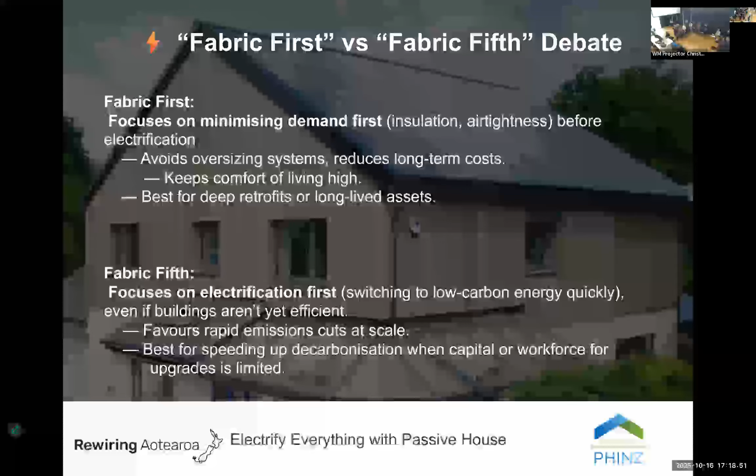We're going to have a very great selection of speakers today, I'm not going to name them all, they're going to be one by one. So we have representatives from the passive house side. We have very high enthusiasts of electrifying everything that moves. There you go, that's the one. We have representatives from our local distributor grids. We have representatives for those who provide us with equipment and materials to make our homes warm and solar. And we have also architects and city council representatives to really cover up every aspect of this topic.

I'm going to pass the floor on to Damien. He's our local Christchurch lead for the Passive House Association, and he's going to walk you through the concept of the passive house. There we go.

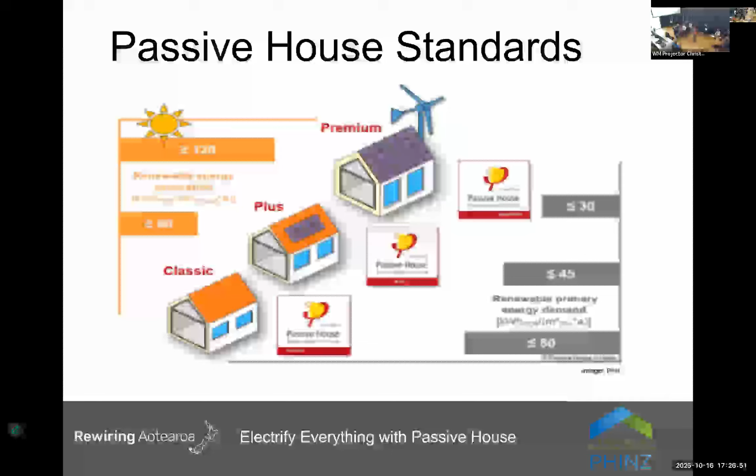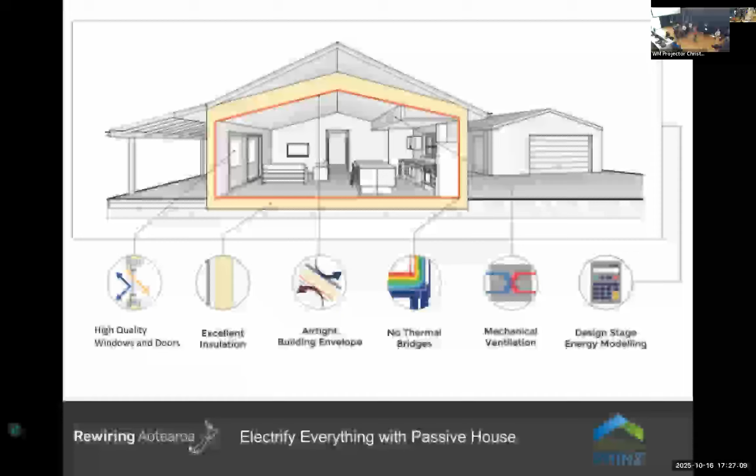My take on the 5 passive house principles: superior insulation, thermal bridge free, wonderful windows, heat recovery ventilation, airtight always. That needs to be wrapped up with energy modelling, which is a design stage thing, not a box-ticking compliance exercise like H1 is. So effectively, I only need 6 things — you only need to remember 6 things to build better buildings for all of us to thrive.

How do we know passive house works? 25 years of testing — actually, if we take 1990, 35 years of testing and refining. Every certified passive house is checked, tested and verified both through the design process and during construction by a third-party certifier.

Passive house provides homes where people thrive. If you're looking to build, have a chat to your builder or designer about how easily you can keep your house between 20 and 25 degrees. Can you test drive the house before it's built? That's what energy modelling can do. What's your continuous ventilation system? Opening windows doesn't work.

And can you add solar panels during there, or can you add them later on?

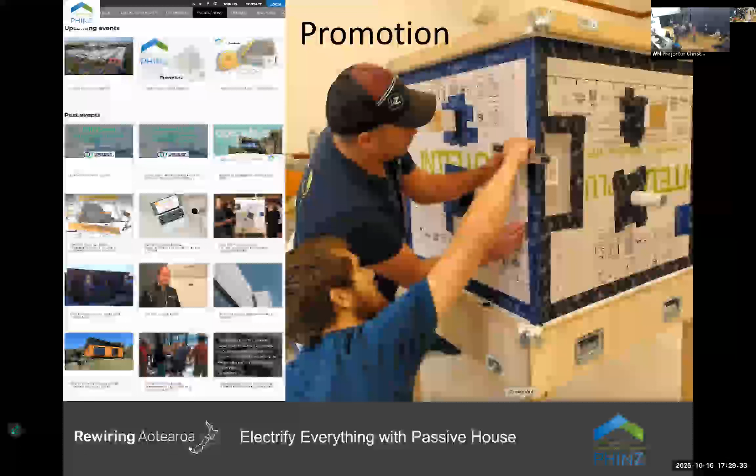We collaborate with industry and we help lobby and promote stuff that's going on. We work with suppliers. We promote what we do, also with suppliers, and there's lots of different trade groups involved. And we provide training through the Passive House Training Academy.

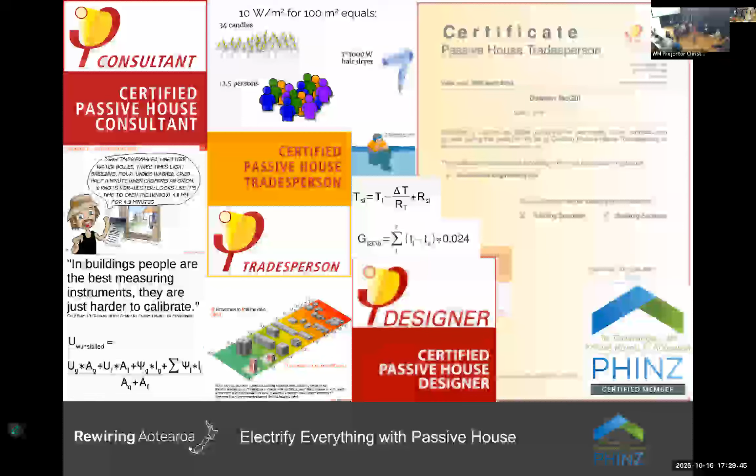Passive House is based on fundamental laws of physics, be it classical or quantum, but it's a technological application that doesn't require rocket science. In fact, anyone can understand it, and more importantly, anyone can contribute to making it happen. That comes from Dr. Wolfgang Feist, who earlier today put a message out about this event.

He said, with very low loads for heating and cooling, it's easy to electrify a passive house or an EnerPHit renovation. Everything you need is already available in the market at affordable prices. What must happen in parallel is the installation of PV systems and wind generators so that most of the electricity can come from these renewable energy sources. These combined measures will reduce dependence on fossil fuels, create local value chains, improve comfort and longevity of the buildings, and reduce climate gas emissions significantly.

I just think it's cool that someone that invented a standard from Germany is following what we're doing in little old Aotearoa.

Join us, get involved, and help us provide futures for all of us where we can all thrive. Thank you.

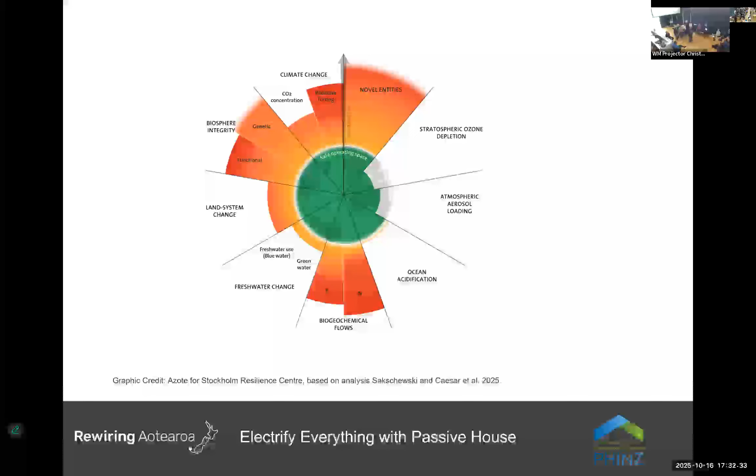Everything that everyone's going to be talking about is directly related to cogs, and let's call those planetary boundaries, and they're all part of a wheel, and let's call that a planetary system.

So, oh, back, stop. You need some training.

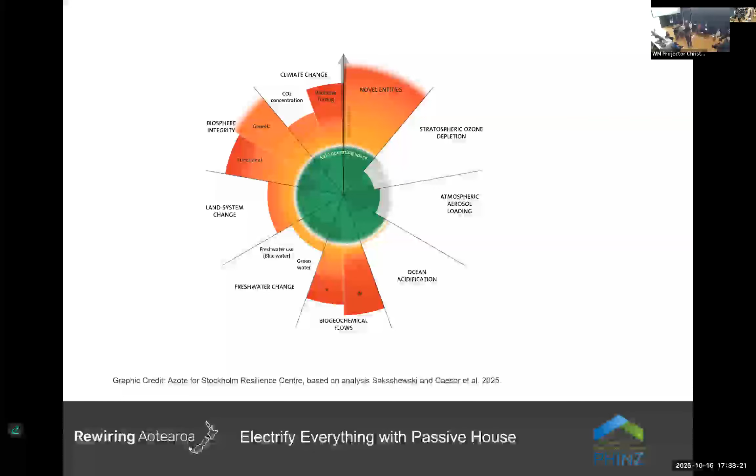2009, a bunch of top scientists, led by the then director of the Stockholm Resilience Centre, Professor Johan Rockström, first proposed planetary boundaries. And these are quantitative assessments, safe limits for human pressure on 9 critical change processes.

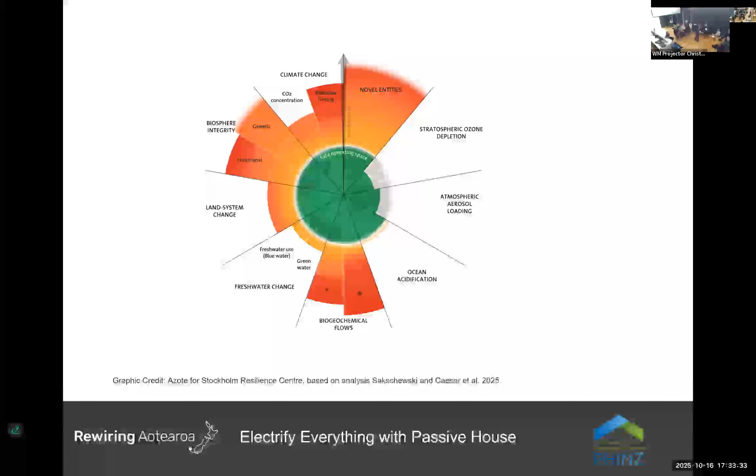Raise your hands if you know what they are. Goody gumdrops. So there are your 9. There were 7 in the first place and 2 were consequently split.

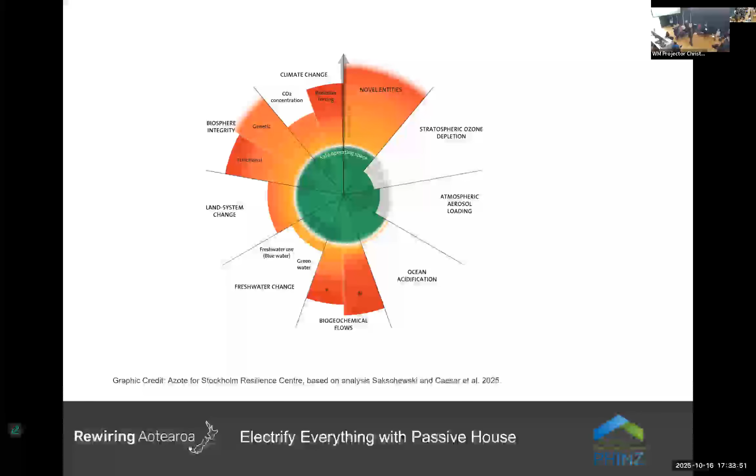And you probably want me to tell you about how they connect to the built environment, which is, I guess, what we're all into here. So, climate change: the industry accounts within cities for over 70% of CO2 emissions, buildings being 1 of 3 primary sources along with transportation and energy production.

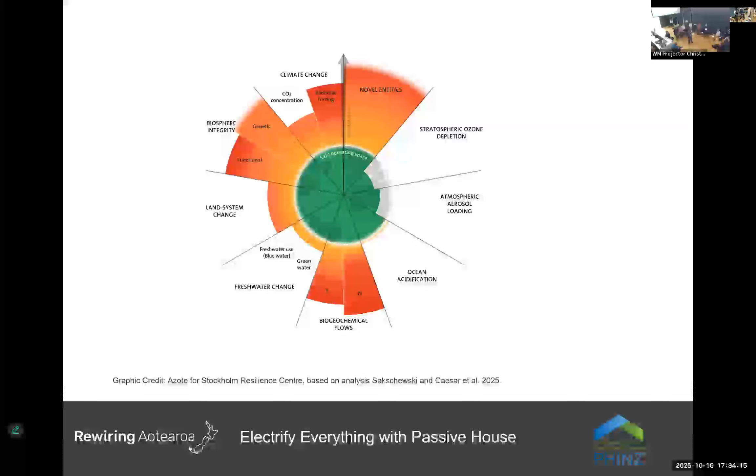Second boundary, novel entities. This includes plastics. So within the built environment, pretty easy to understand that building material supply chains cause pollution.

Stratospheric ozone depletion. How do we affect it from the built environment? Well, though aircon refrigeration gases have been largely regulated, they're still being used illegally in parts of the world.

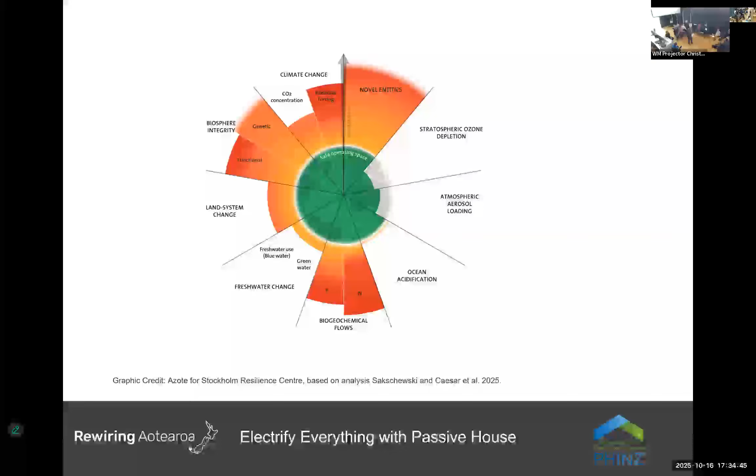Atmospheric aerosol loading. Within construction, our construction and demolition practices produce particulates and air pollution.

Ocean acidification, got sewage and urban runoff, affecting that from the built environment.

Modification of biogeochemical flows, stimulated by fossil fuel production and combustion. Freshwater change, impacted by concentrated urban water runoff.

Land system change, impacted by unsustainable production of timber products, and biosphere integrity, impacted by urban development.

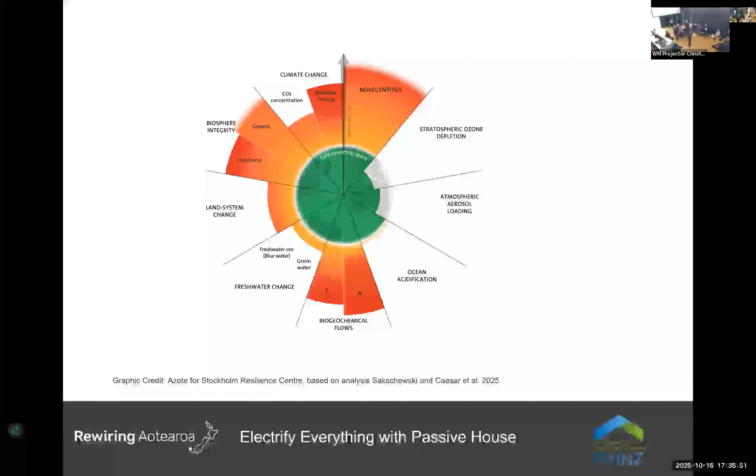From the Stockholm Resilience website, word for word: crossing boundaries increases the risk of generating large-scale, abrupt or irreversible environmental changes. The impacts of these changes will not necessarily be immediate or drastic, but together the boundaries mark a critical threshold for risks to societies and the biosphere that we're part of.

So, next slide there.

Assessments have been undertaken on the state of the planetary boundaries since 2009. In 2009, 3 of the 7 assessed boundaries had been crossed, and this included climate change. By 2015, 4 had been crossed.

By 2023, 2 of those boundaries were split, and 6 of the 9 assessed had been crossed. By this year, 7 of the 9 have been crossed, currently leaving only stratospheric ozone depletion and atmospheric aerosol loading.

So Arup, who are quite a clever bunch, in 2021 released a report designing for planetary boundary cities. Within it, they considered the 9 boundaries, how the built environment was detrimentally impacting those boundaries, and what could be done to bring about positive change.

So they worked and developed 20 regenerative actions that are considered could be implemented within the built environment that will in turn bring about change for all 9 of those boundaries.

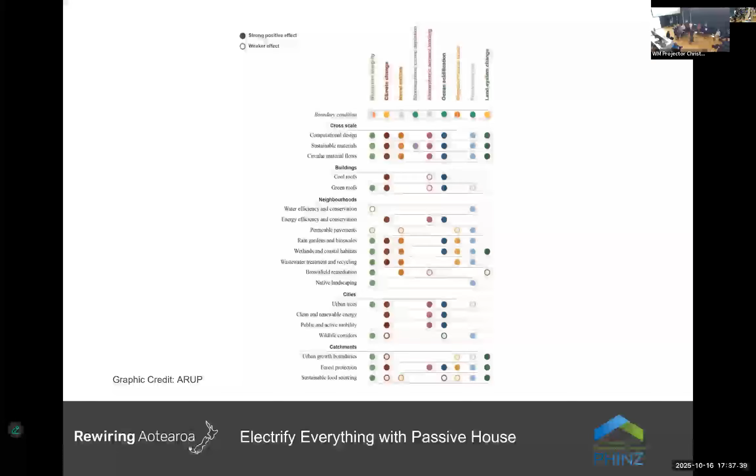Professor Johan Rockström, who's now current director of the Potsdam Institute for Climate Impact Research, and the centre itself since 2024 has been using the planetary boundary framework for its planetary health check. Their 2025 report was published last month.

In its executive summary, the 2025 Planetary Health Check report concludes that 7 out of 9 planetary boundaries have been breached, with all 7 showing trends of increasing pressure, suggesting further deterioration and destabilisation of planetary health in the near future. I know that's good news to you all.

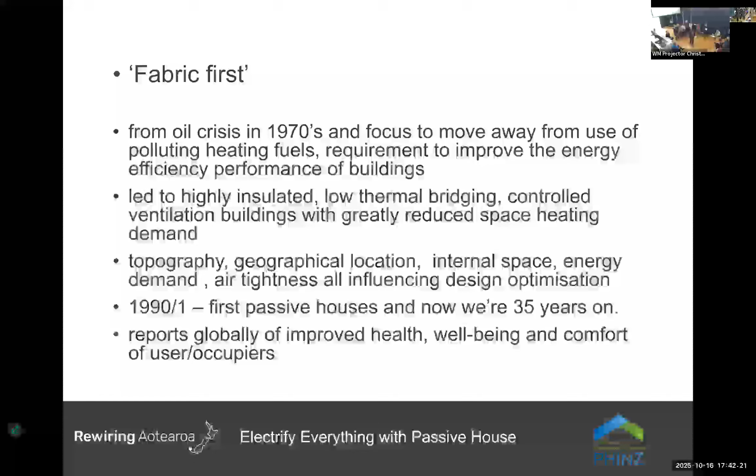It's nice, isn't it? Our existing stock is 1.85 million homes. The Green Building Council have identified that 800,000 of them were built before 1978, which probably means they haven't got any wall insulation - and I found most of them during the earthquake rebuild.

Do you want some of that? Of course I do.

So getting it right: 200,000, we're building 30,000 new ones a year, so 200 is going to take us quite a while to sort out, plus the 600 after that. So we need efficient use of all of our tools, and modelling has to take centre stage. Identifying 200,000 and 800,000 in an economic manner has to rely on some form of sophisticated criteria to identify where that work is going to bring the greatest benefits initially in the programme.

This could potentially involve the use of a retrofit coordinator and a whole pile of stakeholder involvement, training and policy change, fundamentally addressing the first and fifth response simultaneously.

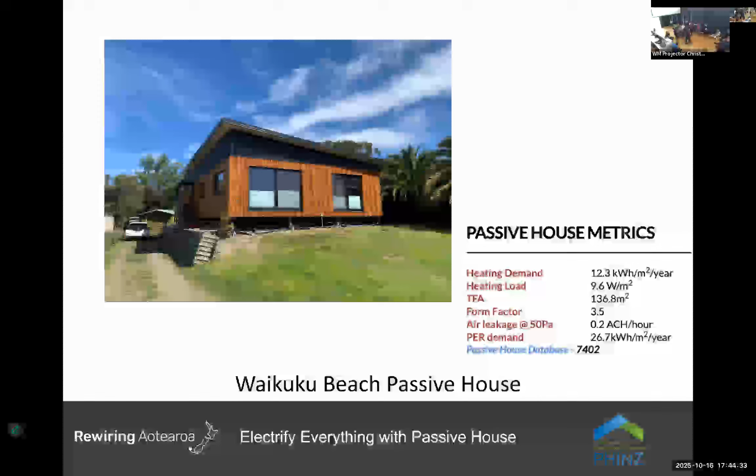Quick show of hands, how many people in this room want shit to be better? That's why I say e te whānau, we're all part of the same family. We might disagree a little bit on what is going to make shit better, but we all want shit to be better, right? Now, I want you to give me a warning at the 5-minute mark and then again at the 1-minute mark, just yell out. I'm used to it. But yeah, kia ora everyone.

My name is Mike. I run an electric cherry orchard about 5 hours drive from here, down in central Otago. We do grow the best cherries in the world, but what I've become very well known for is the fact that we run our farm entirely on 21 electric machines. Yes, I am all about electrification.

I've been asked to be very spicy tonight in terms of talking about electrification over fabric improvements in homes, and I intend to do that. But again, we're all part of the same whānau. I know in every single slide, someone in this room is going to go 'yeah, but' in their mind, and when you do that, I want you to hold on to it. We're going to have a panel discussion afterwards because there's so much nuance in this debate that I can't cover everything in 15 minutes.

I'm also the CEO of an organisation called Rewiring Aotearoa, which is all about electrifying the whole country very, very quickly, talking mainly about households, but also farms, small businesses, and eventually absolutely everything.

We aim to build the cheapest and most renewable energy system in the world, and we're going to do that by concentrating on the low-hanging cherries, everyone. Good joke that, isn't it?

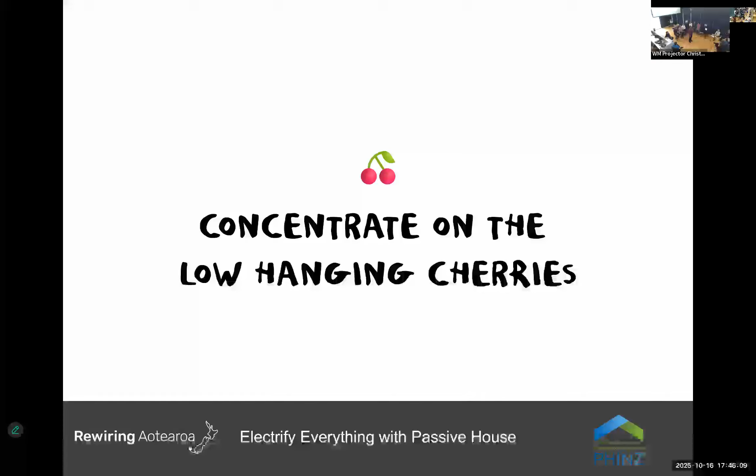There are 10 million fossil fuel machines in New Zealand. 700,000 are close to impossible to electrify right now - the big machines where the technology doesn't exist, or maybe exists somewhere in the world but is hardly economic for us in New Zealand. There's 1 million machines that are almost ready, and 8.5 million machines that are ready to electrify right now with today's technology, off the shelf in New Zealand, where we will save a bucket ton of money.

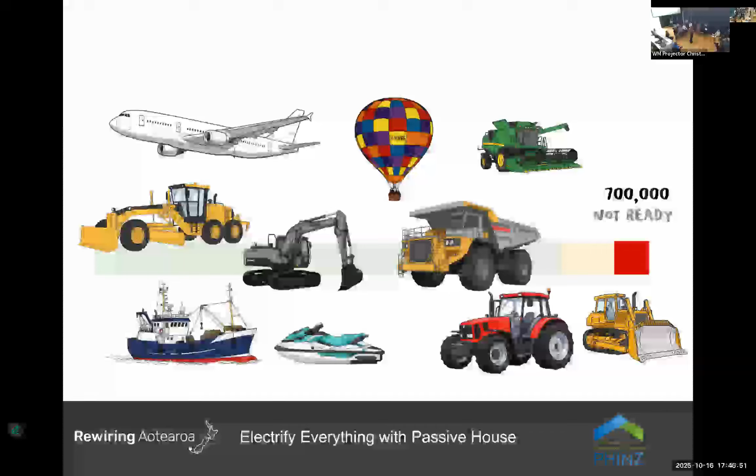There are 64 hot air balloons in New Zealand. The hot air balloons are not a reason for us to delay electrification of our country, right? It's as simple as that.

There are about 1 million machines that are almost ready - our utes, some of our smaller tractors, our boats, the 50 electric dump trucks we have up in Auckland. These require electrification heroes to start electrifying them, burning far more energy and willpower than we would consider reasonable. And there's 8.5 million machines that are ready to electrify now.

And where do most of those machines exist in New Zealand?

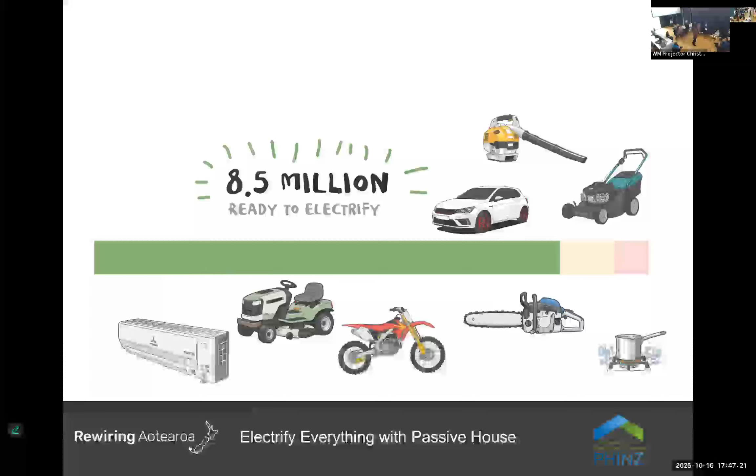In the home, 100%, right? They account for about 25% of New Zealand's gross emissions. It is a ridiculous amount of emissions that we emit every year that we no longer need to, and we're spending a lot of money doing so.

Now, the important thing is I come at this from a slightly different angle to the built environment, or people that are professionals in that space. I like to include the car. When I think about the customer, I think of their bank account and all the money that leaves their bank account to pay for energy. And as soon as we include the car in this, along with our space heating, the way we heat our water, the fridge, the light bulbs, and everything else, it starts to paint a different picture on the ROI for the households of New Zealand.

Electrification is the efficiency that we have always been looking for, right? When you have a fossil fuel home that runs off gas and petrol, and then you compare it to a fully electric home, it uses about a third of the energy to do the exact same job.

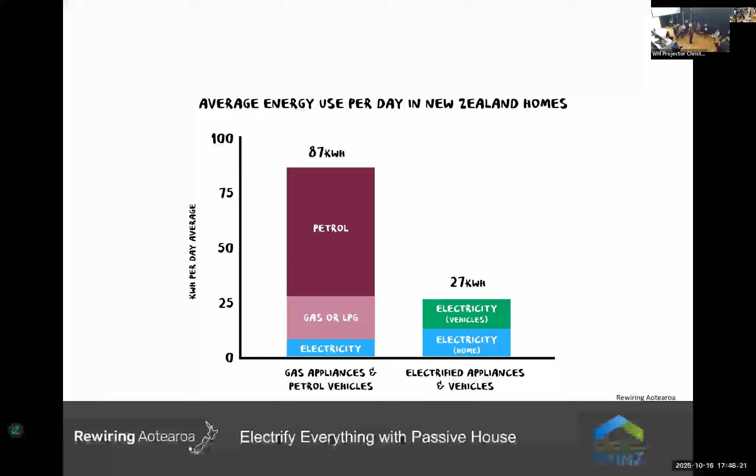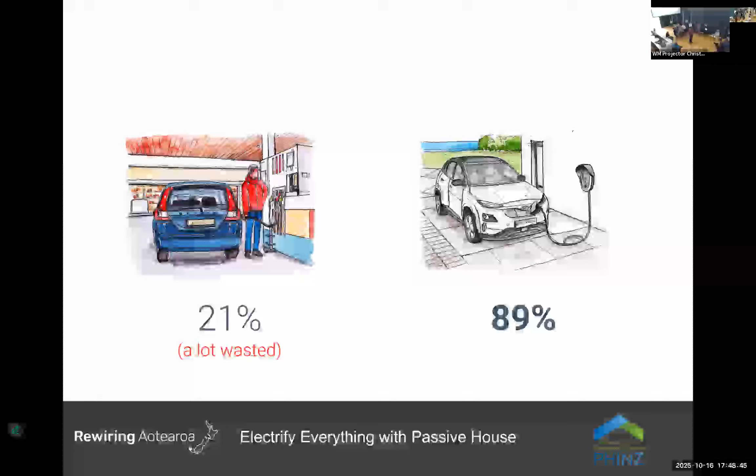Pretty remarkable. And if we look specifically at our cars, when you put a litre of petrol or a litre of diesel in your car, about 21% of that energy is actually used to push the car forward. Everything else is wasted heat, wasted noise, vibrations. When you put electricity into an electric car, nearly 90% of it gets used to push the car forward. They are far more efficient machines.

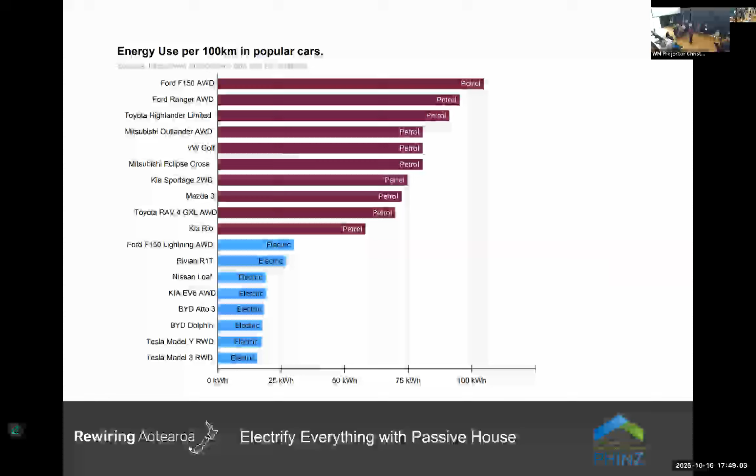In fact, they're so efficient, when you look at the largest electric vehicle on the market in New Zealand, a Ford F-150 Lightning that they convert in Australia and bring over here, it uses less energy than a Honda Jazz. Isn't that remarkable, right? This is energy efficiency right here.

And what's really interesting, of course, is that 85% of energy put into EVs in New Zealand come from sockets in the home. Yes, the car is a massive part of home energy bills moving forward.

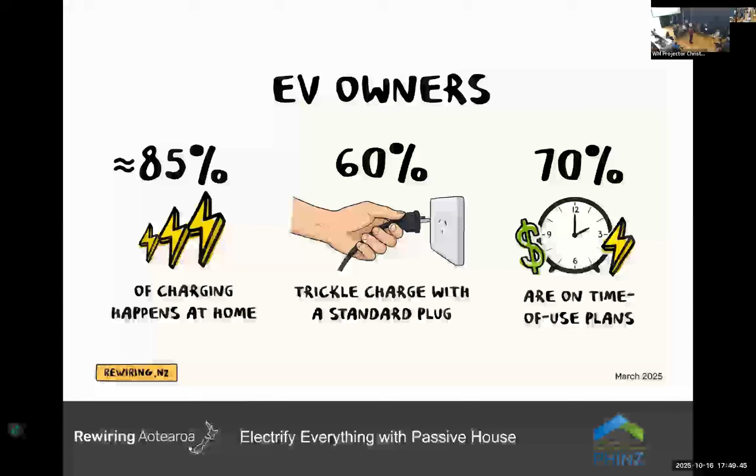Then we can look at our heating. Very simply put, if we put wood burners in homes, about 65% of the energy in a log is used to heat the home. The other is wasted in things like light and noise and heat going out the chimney. When we look at gas heating, it's about 80% efficient, which actually sounds pretty efficient, doesn't it? Of course, you all know this.

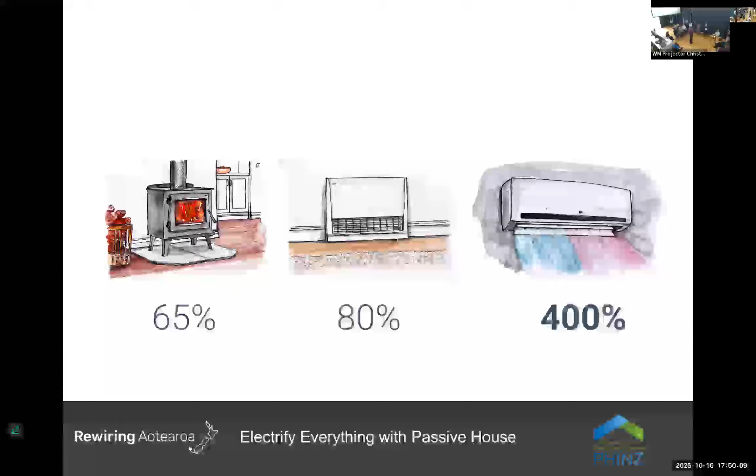Heat pumps, 300 to 400% efficient, right? Remarkable returns on investment. And when you look at this, you can sort of see the daily requirements of energy use, but based on the different types of heating appliances in the home. It is remarkable how much of an impact a heat pump can make over, say, gas or LPG heating in this country. And of course, that translates to the overall lifetime cost of an appliance.

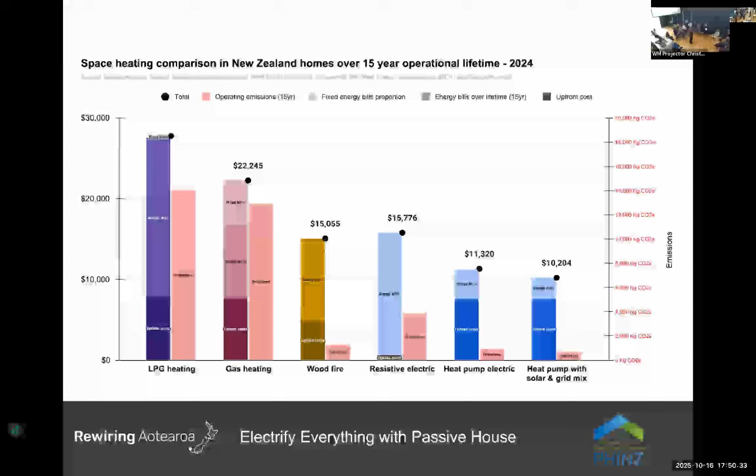If you buy a gas heater for your home, you're paying significantly more money over the lifetime than if you pay for an electric equivalent.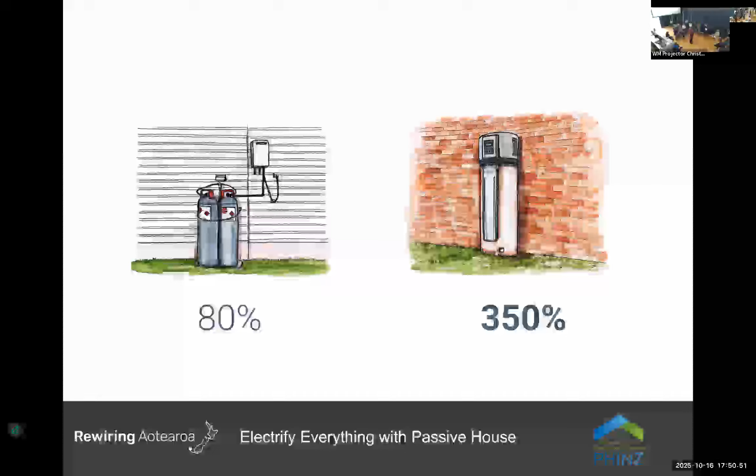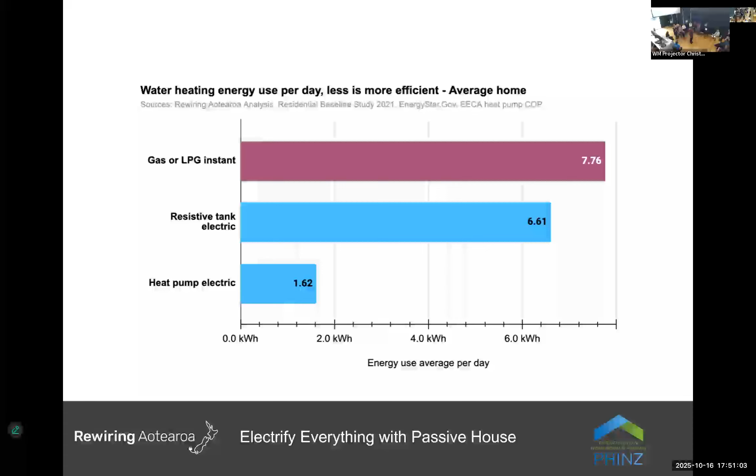Then we've got our hot water. Hot water heat pump just over there - I encourage everyone to have a look at that in great detail. But again, gas hot water heating is about 80% efficient, while hot water heat pumps are about 350% efficient. When you look at the amount of energy required to heat water with a hot water heat pump per day, it is considerably less than a gas equivalent and considerably less than an electric resistive equivalent. And again, the prices for lifetime ownership of these machines is considerably less.

Then we look at cooking - 30% efficient. And with that, we're putting all sorts of bad chemicals out into the air, nitrogen dioxide being one of them, that have a lot of serious health impacts.

70% of that is wasted compared to about 78% efficiency of an induction cooktop. Remarkable savings again. And again, when you look at the energy use in the home, not as higher amounts of energy are used for cooking, but it is still far more efficient.

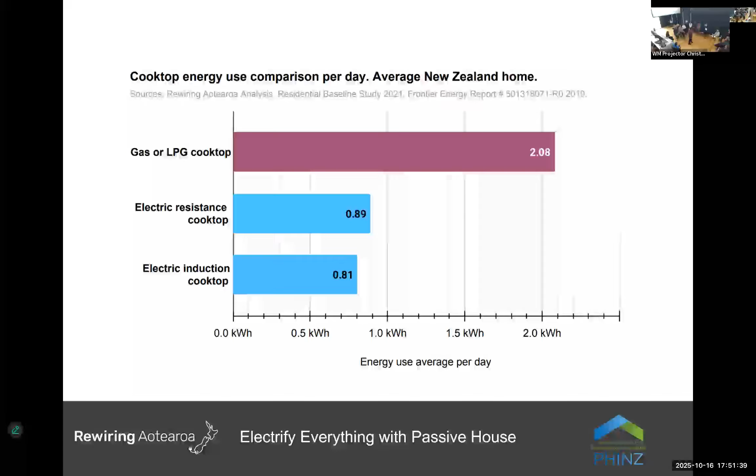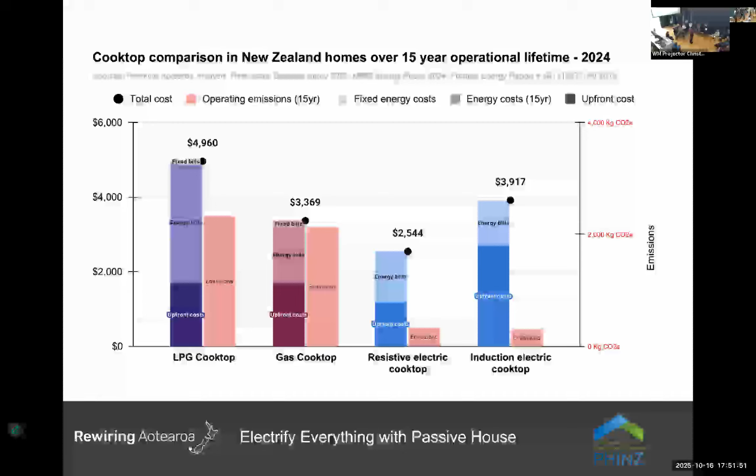Because it uses less energy, at the moment we're not at a point where we can say induction cooktops are going to be cheaper than gas cooktops over their lifetime, especially on the reticulated gas networks in the North Island. But with the fact that we're running out of gas, that is changing very, very quickly.

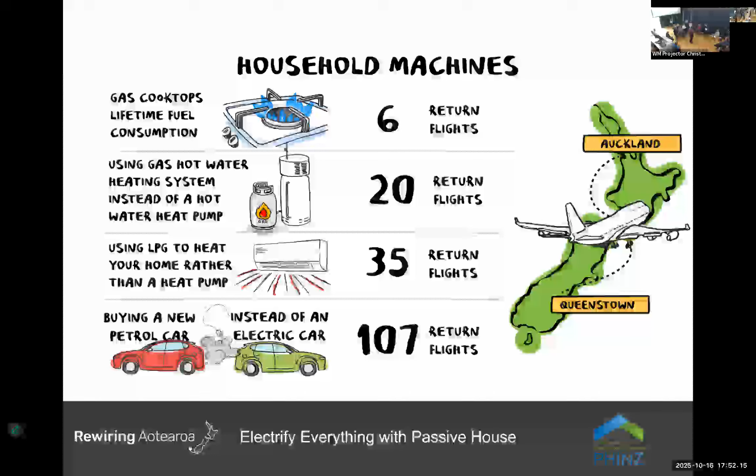Another way of looking at this is the electric machines in the home. If you choose an electric machine in the home over a fossil fuel equivalent, think of it like the number of return flights between Auckland and Queenstown. We always talk about climate action being in terms of maybe eating less red meat, drinking less milk, flying less. The number one way that the households of New Zealand can have an effect on climate change is to make sure they go fully electric.

We must electrify everything. But what happens when we electrify everything? Our power bills go right up. Yes, because we consume way more electricity.

And this is the breakdown of a power bill in New Zealand. You're paying about 35 cents a kilowatt hour for what we call delivered energy to the home. Half of that is generation at our large power plants, and the other half is all the other stuff that we have to pay for to transport those electrons from the power plants to our homes.

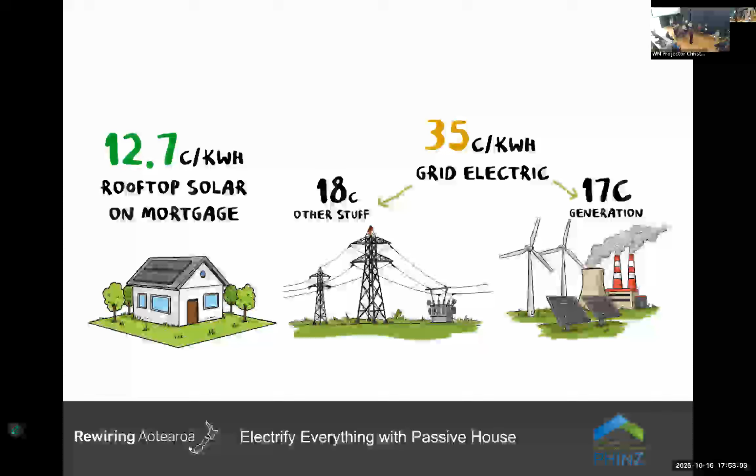And just to give you some stark contrast, when we finance solar panels on our rooftops at 5.5% interest rate, so a standard mortgage interest rate, nothing clever, it works out that those panels will generate at about 13 cents a kilowatt hour. Remarkable savings opportunity.

In fact, even if you look at gross savings and you take out the capital repayments and the interest repayments on a 9 kilowatt system, the average typical home in New Zealand will still save $1,000 a year. That is $3 a day return from day one when you finance solar panels on your rooftop. It is by far the best ROI of any home improvement that a family can do within our country.

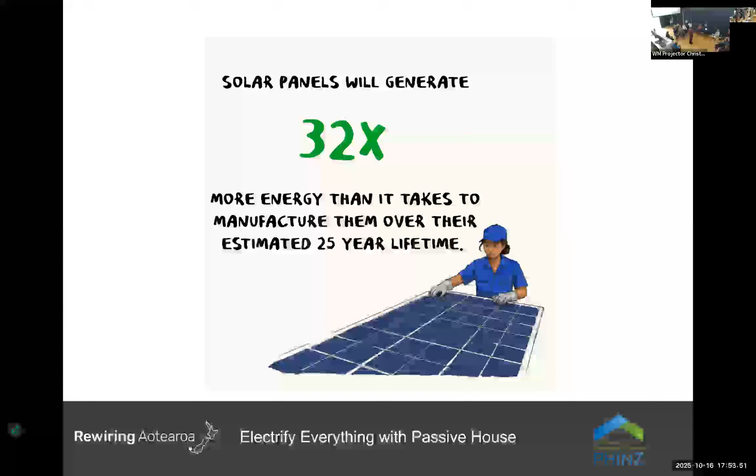We talk about embodied carbon emissions. That comes up a little bit. The important fact to remember here, again, with New Zealand solar yield, is it's very important that we use New Zealand data. A solar panel will create 32 times the energy that it takes to make it over its lifetime. It is a really significant improvement on energy production in our country.

And one of the other things to think about is that even in winter, a 9 kilowatt system will generate the same amount of energy as 1 tonne of coal. And I know, because we're all part of the same whānau, that we're incredibly embarrassed about the amount of coal that we burn for electricity in New Zealand.

120,000 homes with a battery, right? That is larger than the peak response of our largest hydro dam. A lot of a little is a lot. The systems improvements from electrifying our households are so significant that we need to all band together and figure out how to make this happen very, very quickly.

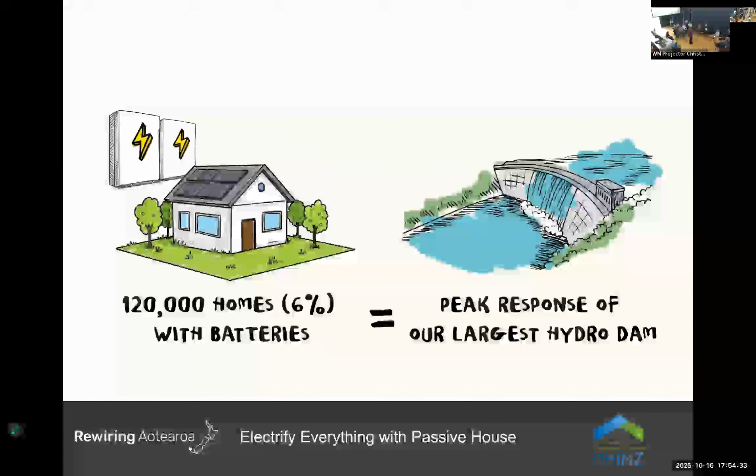See, New Zealand's energy system isn't actually very renewable at all. We like to talk about how renewable our electricity system is while sweeping under the rug how unrenewable our overall energy system is. And it's expensive.

Collectively, you and I spend $55 million a day on fossil fuels. Isn't that a remarkable amount of money?

Just electrifying all the homes in New Zealand, including the cars, putting some solar panels on the roof and a battery in the garage, will save our 2 million homes about $29 million a day. That is so much money.

By 2040, if we do this and we commit to doing this, that's $100 billion, which is so much that no one knows how to contextualize how much money that is, so I've done it for you. We could not build hospitals fast enough to keep up with the household savings.

This is not money that's going to Christopher Luxon or Treasury. This is money that stays in our wallets in our communities. This is why I get so passionate about this kaupapa. We could not build Christchurch rugby stadiums fast enough to keep up with your savings. That is how remarkable this opportunity truly is. It also shows you just how expensive Queenstown roundabouts can truly be.

Rewiring Aotearoa was born out of the work that a chap called Saul Griffith, an Australian, did in America, and then moving back to Australia and starting Rewiring Australia. He makes climate action really simple for everyday people to understand.

Now, how many people had a 'but' thought? One, two, couple of you, good. Hold on to those, because I can't wait for this panel discussion when we can go into a lot more nuance, because I don't have enough time to go into all the nuance over the phone. But if there's one thing I can ask you to do, it's I want you to electrify everything in your life. And once you've done that, well, then I want you to electrify everyone in your life. Thank you very much.

Kia ora, I'm Pip Newland. I'm the head of sustainability risk and insights. We do all the future energy scenarios at Orion, and I also have the fun task of looking after the market and customer innovation team. They do all the stuff that looks at how people use energy and how that affects the assets that we're actually investing in.

So just a little background about Orion, apologies for those who already know this. We are the lines company, the electricity distribution business for Central Canterbury. We cover Christchurch, the Selwyn district, and Banks Peninsula. We've got about 228,000 odd connections now, about 8,000 kilometres of lines. We're a linear infrastructure company, so we own lines, cables, kiosks, substations and all that kind of stuff. We are effectively an electron courier, so we invest in that infrastructure.

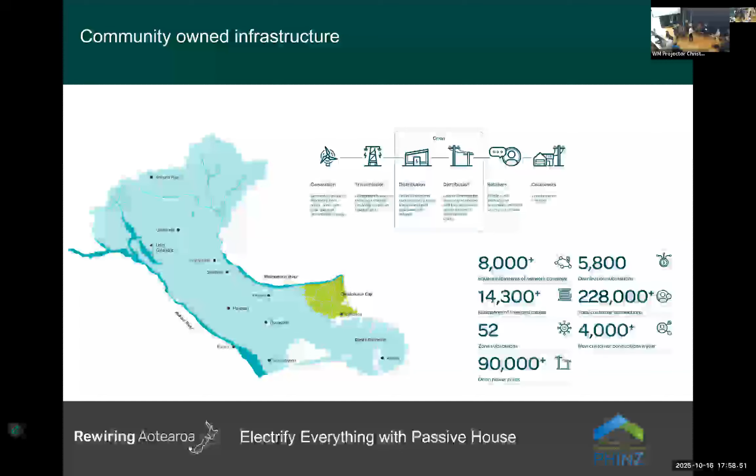Probably the thing to bear in mind in this conversation is that infrastructure is two things really. One, it's owned by the community, so we are owned effectively by the City Council via CCHL and the Selwyn District Council. The other thing is that infrastructure is an asset, and it's a carbon sink effectively. Every piece of infrastructure we own carries an embodied carbon footprint with it. So the better we can design our network to change how people use their electricity, and the more efficiently they can use it, the less infrastructure we build, the less carbon goes into it. So there's a bit of a trade-off there.

The other thing to bear in mind is that Orion in various forms has been around since about the 1900s, so there have been a few transitions during that period. One thing to recognise about this community in particular is that we're really good at transitions. First, moving from coal, gas and steam in terms of local generation. Then we moved into electrification of home heating. And now we're moving into this new period of time with redistributive systems.

So what does that look like for us? Redistributive systems - if you think our network has traditionally been built as a linear system, it takes electricity from generation in central places, transports it through the transmission system, thanks Transpower, gets it converted into residential and business friendly voltages, and then transports it to your house or business. So traditionally it's gone one way.

Now we're actually in a position where the technology has evolved enough that electricity can travel back the other way as well. This opens up a whole raft of opportunity for communities to generate and share electricity in a way that isn't constrained by central generation, and actually enables them to be more resilient and produce more affordable electricity within their own energy ecosystems. So you're moving into that kind of model.

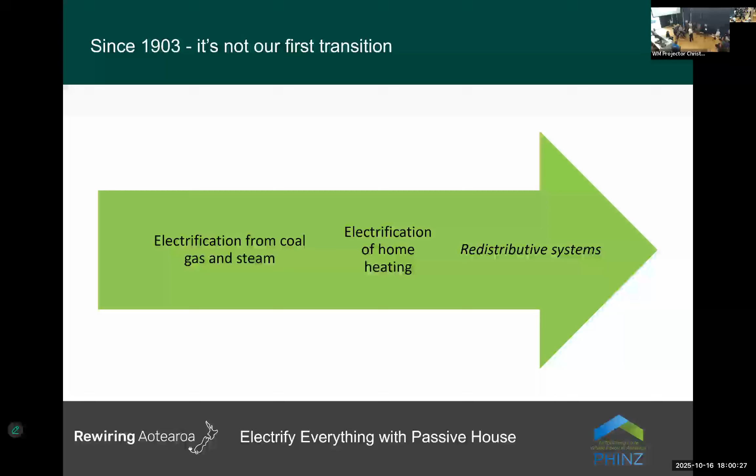That in itself lends itself to being able to manage this transforming system - we call it the trilemma. So that's balancing energy equity and affordability, energy sustainability - how is it generated, how much carbon is associated with it - and energy resilience, which is thinking about whether it's there all the time when you need it. So when we make investment decisions as a business, we're always thinking about balancing these three things, and a truly sustainable system does that really well.

Consumers, and the way they use their electricity and the things they use their electricity within, play a really big part in balancing this trilemma. It can't just be done from one party within it.

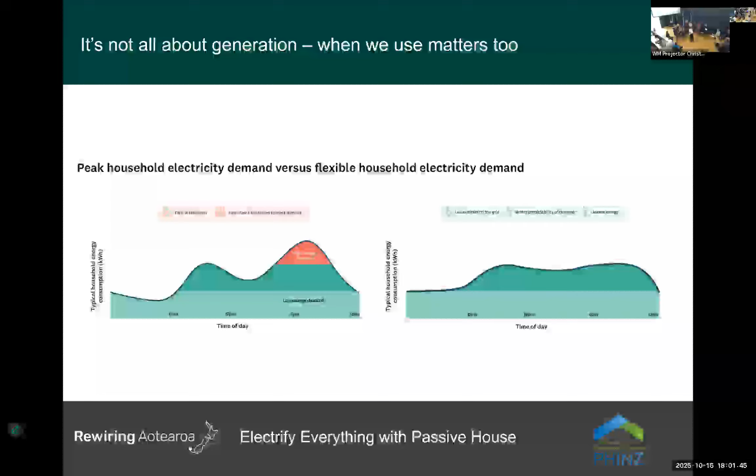Just leading into that a little bit, it's not all about generation, and that's sometimes what people miss. We talk about both supply side and demand side when it comes to energy. So this is a pretty typical household electricity demand - I've pinched this off the EECA website, thanks EECA.

When people use matters just as much as how they use and how it's generated. So if we're able to shift when people use - if you can see that little red hump - you can flatten it out, and that changes the electricity mix delivered to your doorway. Typically the generation stack brings on the most expensive things at the end, so if you want to avoid using coal to generate your electricity, you need to think about when you're using.

Now, what typically happens is everybody switches on their jug at 7 o'clock in the morning and cooks their dinner at 6 or 7 o'clock at night, and that adds up to a peak. We build network and generate, and the generators generate to service that peak. So you've got to think about what goes into that space.

So I'm going to talk about Orion now. We definitely build network to service our peak - we talk a lot about peak load. A lot of what our market and customer innovation team are doing is investigating demand side options to shift that red peak onto different times in the day. And that's when storage becomes a really big thing.

What do you use to store energy? People think straight about batteries, but you've actually got hot water in your house, and your whole building envelope is storage. That becomes a really important part of how we manage energy use within the system, and that can bring the whole energy costs down and also the associated carbon emissions.

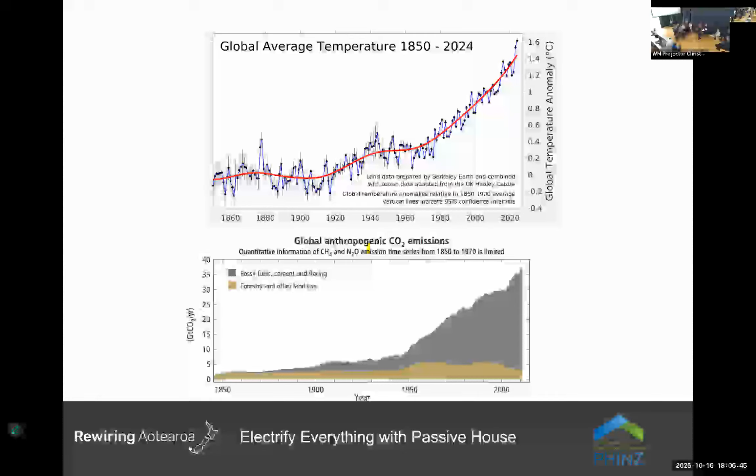These fuels, mostly coal at first, then oil and gas, were burnt to power steam and internal combustion engines, to run furnaces and factories, and to mechanize the means of production. As a result we have the living standards of today: sleek glass and steel buildings, and as Dire Straits said, microwave ovens, custom kitchens, and colour TVs.

But as the old saying goes, there's no smoke without fire, and when you have a lot of fires, it stands to reason there's a lot of smoke. All that smoke, largely carbon dioxide, ended up in the atmosphere, as did an alphabet soup of other gases: methane, nitrous oxide, CFCs, HFCs, HCFCs, and so on.

As we now know, but have conveniently ignored since 1824, these gases trap heat radiating from the Earth, creating a greenhouse effect and raising the temperature of the atmosphere. Collectively they're called greenhouse gases, or GHGs, and we measure them in equivalent units of carbon dioxide warming potential, usually just abbreviated to carbon.

So constructing and running any building emits carbon. This might happen in any number of ways: loss of forest cover due to logging to provide timber, manufacturing processes for products such as cement, steel, or glass, or building air conditioning.

To allow us to compare apples with apples, carbon is lumped together into different packages or modules depending on when it's emitted. The stuff emitted during the actual construction process, before you get the keys, is known as upfront carbon, embodied carbon, or modules A1 to A5.

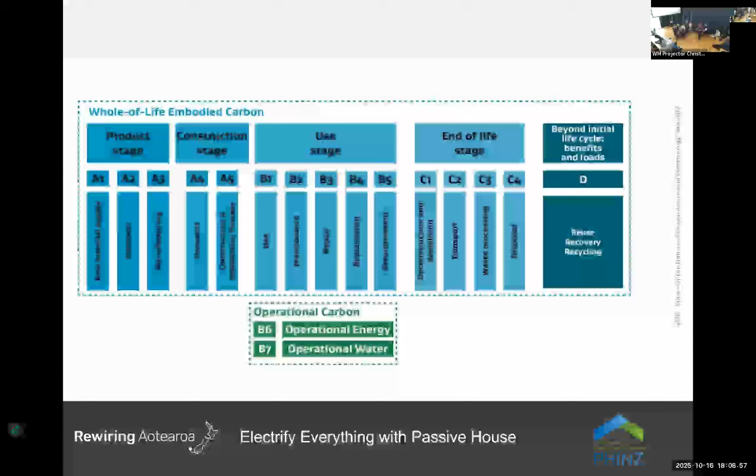C1 to C4 is the end of life stage, including demolition or deconstruction, transport, waste processing, and disposal. Stage D covers any benefits beyond the building life cycle, recycling or reuse — this is where the circular economy comes in. Products used here can approach carbon neutrality in their second life.

Overall, buildings contribute 39% of global greenhouse gas emissions. On average, 60 to 80% of this is upfront or embodied carbon, and the remaining 20 to 40% is operational carbon — heating, cooling, and so on. But the exact split varies depending on location and how the electricity is generated.

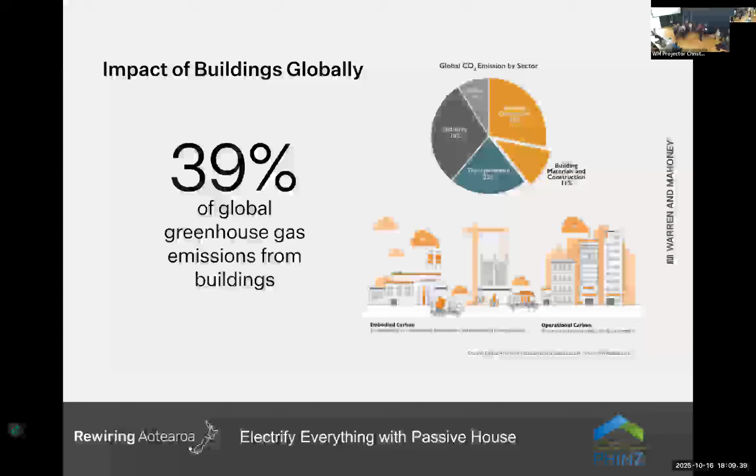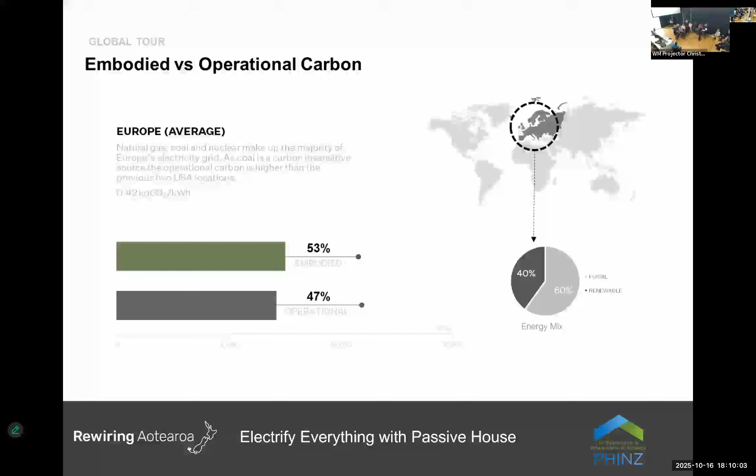Warren and Mahoney did an exercise a few years ago to compare the exact same building in different locations to see the effect of different grids. What you want to look at here is the dark grey bar at the bottom — this is the operational energy, which in effect measures the amount of carbon emitted by each grid. In Europe, we found a 50-50 split between upfront and operational carbon, and their grid is reasonably clean, around 40% renewable. In the US, New York and California are reasonably similar to Europe, although with less renewable energy.

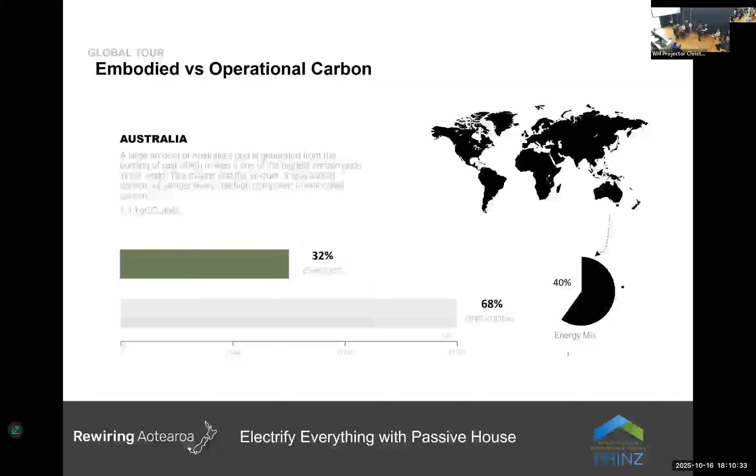By comparison, Hawaii has a very dirty grid and relies heavily on coal and oil, with a 60-40 split between operational and upfront carbon. Similarly, Australia has a phenomenally dirty grid, uses heaps of coal, and has a 70-30 split between operational and upfront carbon. So the trend is that the dirtier the grid, the bigger the effect of operational carbon.

But in New Zealand, as always, things are just slightly different. The graph on the left, my right, your left, suggests the energy use of the building is around 5% of the national energy use, but this doesn't account for the construction processes. And when upfront carbon and imported materials are included, as you see on the right, the construction sector contributes to around 20% of the national carbon emissions.

But this is still only half of the international average of 39%, for several reasons. Our electrical grid is largely renewable, around 85%, ignoring the cars though. We have a much higher proportion of agricultural emissions than most countries, and we have poorly performing building stock and a comparatively benign climate. As a result, we don't heat our buildings to the levels seen overseas.

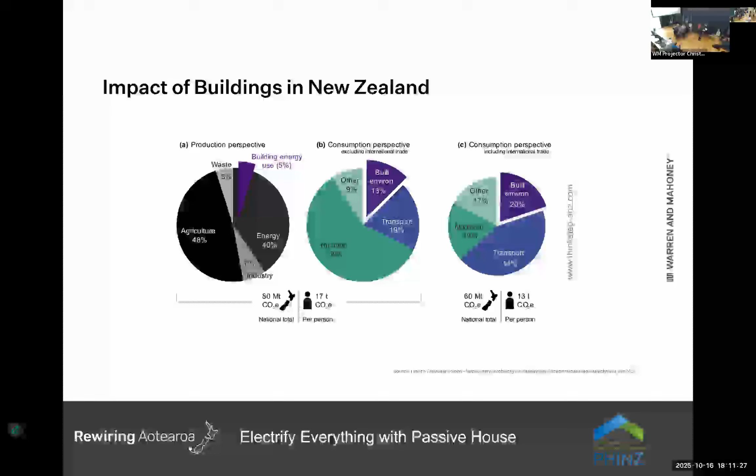And so in New Zealand, because of our clean grid, the upfront carbon of our buildings has a much higher impact than anywhere else.

Essentially then, the fabric first or fabric fifth debate is discussion whether it's better to focus on B6, operational energy use and carbon emissions, or upfront and in-use carbon emissions A1 to 5 and B1 to 5. And as you've just seen, the answer depends on where you live. But there's also another factor to consider, and that's time.

So this is a well-known graph derived by John Ochsendorf of MIT, and the black line shows the upfront carbon that's mostly all emitted at the beginning of a building's life. It's shown effectively horizontally here, although in reality you'd see a few blips when, say, the carpet is replaced or it undergoes maintenance.

The red, yellow, and orange lines show the cumulative operational energy used by low, medium, and high efficiency buildings. And now it would seem possible, as you can see, the more efficient the building, the less energy you use. Strange. So it would seem possible that the operational carbon of a super efficient building...

...say passive house with a net annual energy demand of 15 kilowatt hours per metre squared, might never exceed the upfront carbon emitted by constructing that building, and that's the green line. And if you had on-site generation, say passive house premium, wouldn't that just mean that the solution is to reduce operational energy to effectively zero and all our problems are solved, i.e. electrify everything? The blue line.

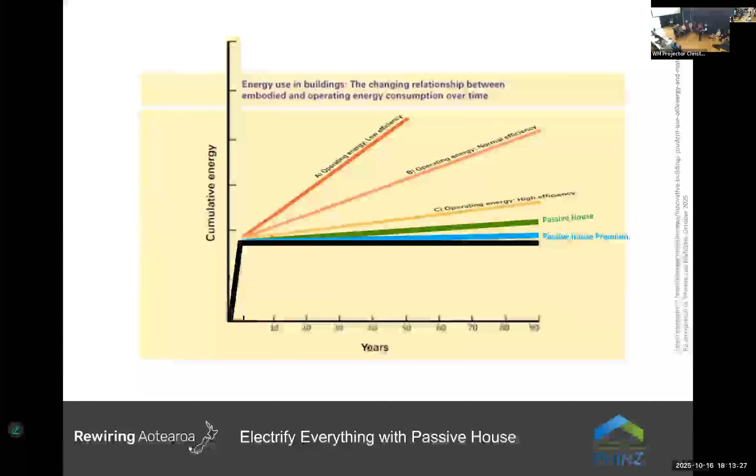But the upfront emissions of the building are actually baked in as soon as the project starts on site. So in reality, the carbon emission profile looks more like this: one big burp to start with, followed by a long tail of ongoing emissions. I was going to make a note that this was the good news, but I'm not entirely sure that's right. Because this is the bad news.

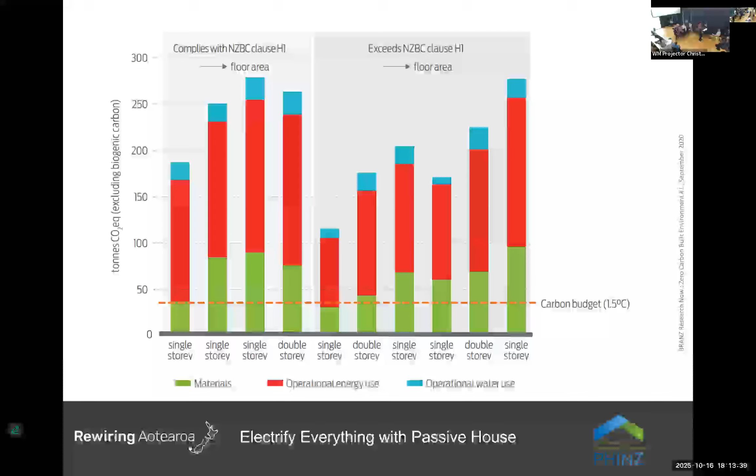The bad news is this graph from BRANZ's 2020 study, Zero Carbon Built Environment number 1. Using planetary accounting, it calculated the allowable carbon emissions for the construction sector if New Zealand was to keep to the Paris 1.5 degree commitments. And that's the red dashed line you can sort of see sneaking in at the bottom there. So you can see there's a serious mismatch. Even the most efficient builds are more than 3 times the 1.5 degree budget.

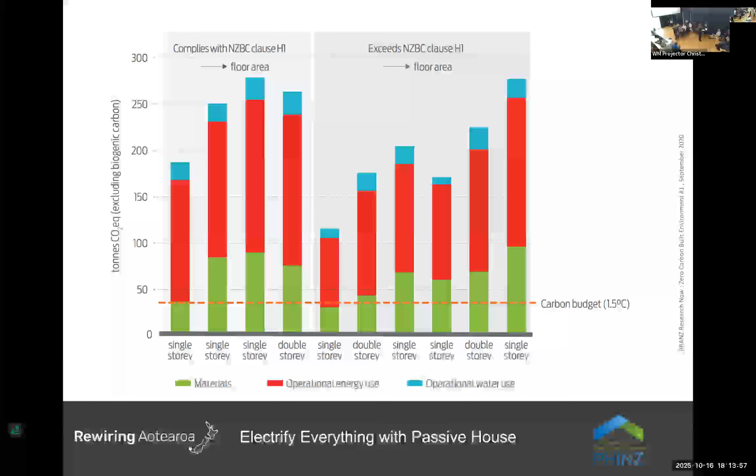So what to do? Well, this helpful diagram sums it up: use less stuff. It's from the Institution of Structural Engineers, but the principles relate reasonably well to architecture. So to start doing myself out of a job here, the first thing is to build nothing.

There's obviously a moral expectation to allow the rest of the world, i.e. the global south, the opportunity and ability to improve their living standards. So somehow we have to navigate that challenge, and it really has to start by leadership and commitment to zero carbon from the Western world.

Secondly, we can build less. We can repurpose, refurbish, and reuse existing buildings. We should be building clever. This is where you guys come in: high performance and low carbon architectural elements. Straw bales, mass timber, and wood wool insulation, for example. Not steel, concrete, and polystyrene. And build efficiently. We shouldn't be building 450 metre square houses for 2 retirees, let alone ones with helipads.

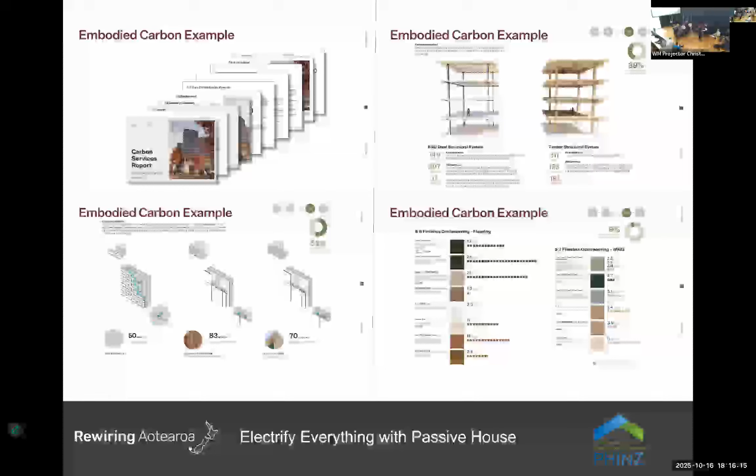More recently, MasterSpec, in conjunction with BRANZ, have released a new website, neco2.co.nz, which is - and you have to hold your breath for this one - the National Embodied Carbon and Environmental Product Declaration Repository. It's more useful than the mouthful it is to say.

BRANZ also have a free and slightly clunky spreadsheet, LCA Quick, which allows you to assess your own project if you've already modelled it.

Operational energy is a bit more tricky for commercial buildings. My experience is that the services consultants will rightly point out that energy usage is hard to predict because it depends on how the occupants run the building, so they refuse to commit to a figure or provide any guidance. But NABERSNZ have a post-construction measurement system for commercial buildings. This has a sinking lid, so it encourages incremental and continual improvement on a year-by-year basis.

And obviously, the passive house planning package is aimed specifically at operational energy and is hence a proxy for operational carbon. But by itself, it doesn't calculate embodied or upfront carbon. There is a plugin, the PH Ribbon, which claims to do this, or you'd have to check that this is appropriate to and able to be set up for the New Zealand market.

There's a number of architects and passive house designers around the country. PHINZ have a list for these, and I'll direct you to the PHINZ people here. Although experience in New Zealand is generally limited to residential projects, a few commercial buildings are starting to pop up in and around Wanaka.

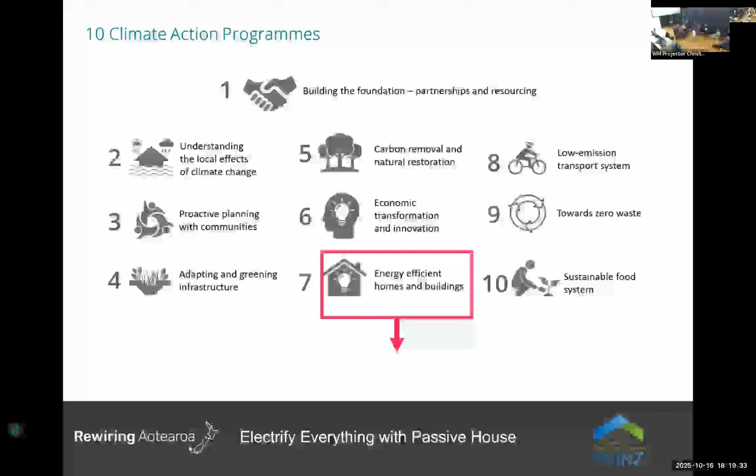With this, we've got 10 climate action programs. They are here. Number 7 is about energy efficient buildings, and that's me, the Eco-Design Advisor Service. It's a free service. So basically the council has a procurement policy, and it's all about finding the right balance between the people, the money, and the environment. It's not something easy to mix, but basically every single project has its own priority, and we need to identify what they are to be able to achieve it.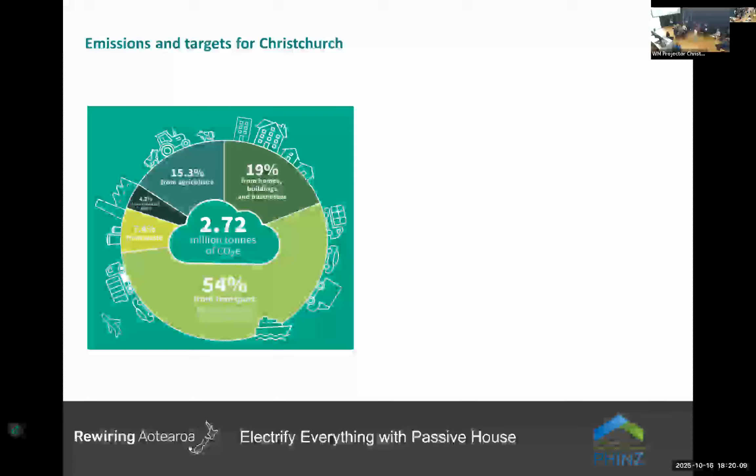So emission and targets for Christchurch. In 2019, this is basically a little diagram that shows you what the emissions were for the district at the time.

We've established 2 goals. So you have to think about, we want to reduce carbon emissions for the district and for the council as an organization - sorry, I'm French, so I stumble on some words. So as a district, basically, we want to be carbon neutral by 2045, and we want to reduce carbon emissions by 50% in 2030. We want less methane as well. And then as an organizational entity, we want to be carbon neutral by 2030.

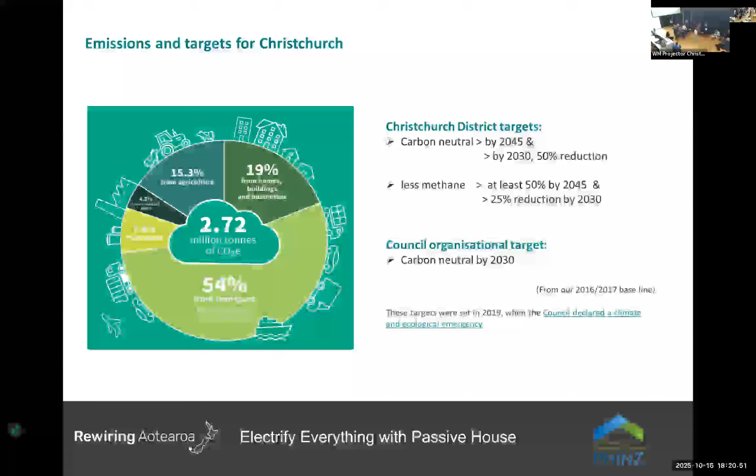So how are we tracking? Basically, this is a little diagram showing the carbon emissions for the district from last year's report. This number is 12% down from 2019, so we are on track for reducing carbon emissions. What we can see here is a bit more about buildings—we were at 19%, now we're at about 21%. Basically, this is good news.

With regard to the council's emissions, so council buildings, this is the diagram we get. And basically here, big surprise, wastewater is the big source of emissions for us. At the moment, we're rebuilding two of the main pump stations and treatment plant, so hopefully by 2030 this will be reduced significantly. You can see here that electrification of buildings is also a big part of it.

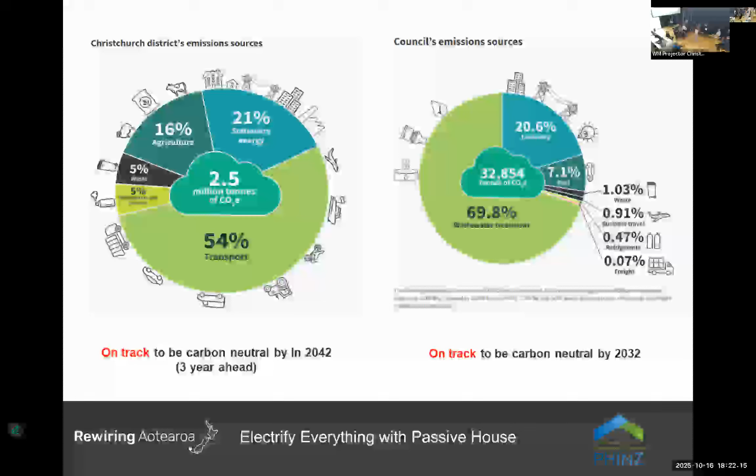So how are we tracking? Basically, we're on track for reducing emissions for the district by 2045. We might actually achieve that 2 or 3 years ahead. With the city, with the buildings, for the organization, we're on track, but for 2032, not 2030. And the main reason is about electrifying. I'll explain that in a second.

So if you want information, you can jump on the council website. We've got a climate action page where you can look at how we're tracking. And if you want data, we've got data, so you can go have a look and see how we're doing.

But basically, from a council point of view, what are we doing when we're building? When building new, we try to do the best we can with regard to the envelope—fabric first. This is the new library, it's a 5-star rating building. This building saves 72% of energy for heating just by having a good system in place.

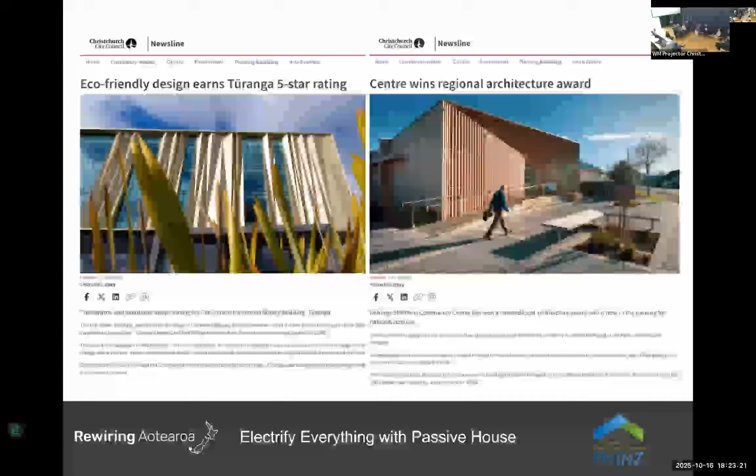Really great. When we build new, we also try alternatives. This is the St. Albans Community Centre, a different approach—we want to reduce carbon emissions on the embodied side, and here we're storing a lot of CO2 in the CLT panels. Different approach, but for new buildings it's very important to have fabric first.

But we know the future is electric. So when we've got existing buildings, what do we do? Well, we're going to slap on solar panels, right? We've got a mandate to put solar panels on all the council buildings.

We started last year with the swimming pool in Hornby. We slapped 625 panels on this lovely roof, and we're saving $90,000 a year. So yeah, this is happening.

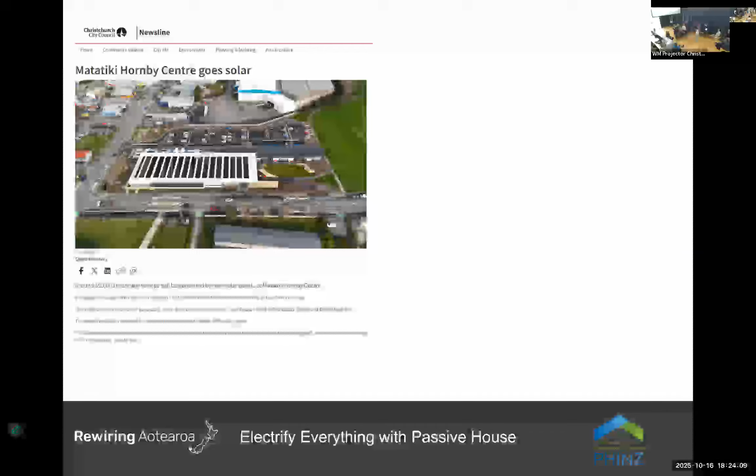We're putting solar panels on all our roofs, and hopefully by the time we've done them all we reach 2032 and boom, we're there. When we do new builds, because we still do some new little builds, we don't really build houses.

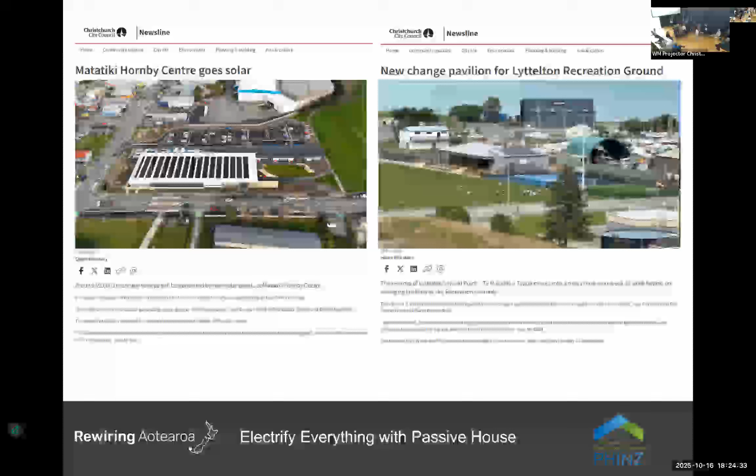So this one is the Lyttelton Recreation Changing Rooms. Basically, we're trying to be as efficient as we can—we slap on some panels, we collect the water, trying to save on site what we can. This building hasn't opened yet, but it's already up and being used. So feel free to go have a look, Lyttelton. If there are people from Lyttelton, peace out.

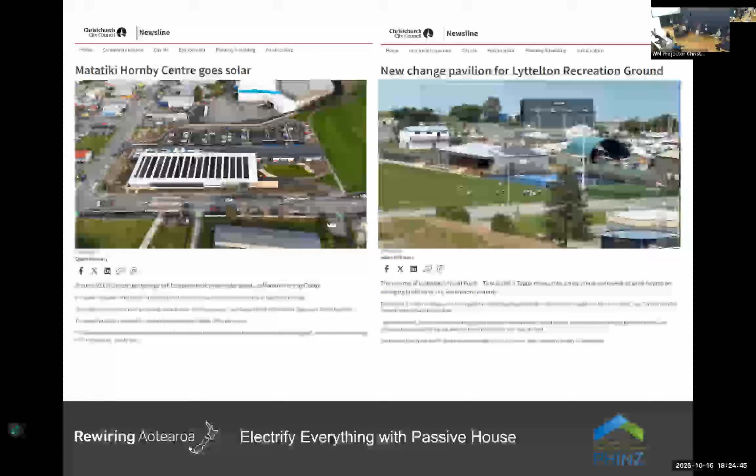I'm from Lyttelton. Okay, so what to consider? From the Eco Design Advisor point of view, because council doesn't build houses, but Eco Design Advisor is about homes.

Well, like Damien says, what's very important is the choices you make. You have options about choosing between economy and ecology, and everything is in your hands—you can choose what's best for you. We have to think about the house as a system, combining the mechanical system you're putting in place, the environment, the building, and you, the occupant. It's very important to make sure everything is actually working together in combination with whatever decision you've made.

Now, if that's not clear enough, I've got this little pyramid that explains how to make the choices. If you build new—and sorry, it might be a bit different from what you're saying—but if you build new, you have to think long-term. The most important thing is the site, the second is the building form, the third is the building envelope, then the services, then the renewables. Site is key, so the building envelope might be third in this scenario for new builds.

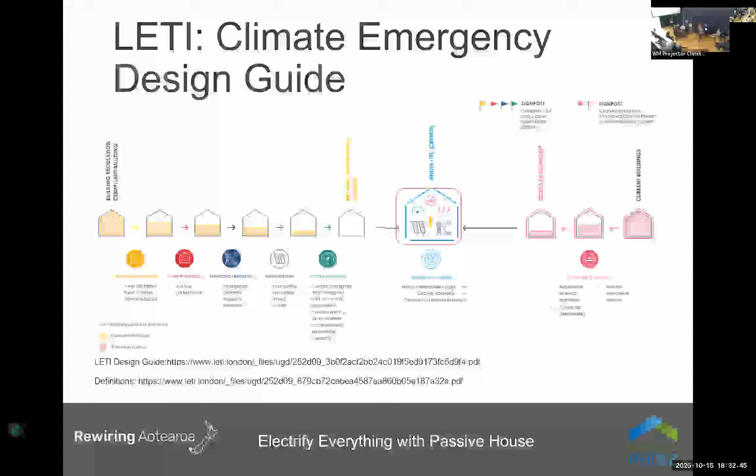So if we look at the building in the middle, it has to be a combination of addressing embodied carbon, that's the red stuff to the right. The yellow stuff is operational energy, future heat needs to be decarbonized, demand response, renewable energy. So that's the link to the design guide - we could just use that. However, it's based in London, isn't it? But we could very quickly just adapt it to New Zealand.

The other possible solution is a future home standard in the UK - just a couple of screen prints from the left-hand side, all electric, low energy demand with heat pumps and solar. From 2027, I think, all new homes in the UK have to have solar on the roof. Homes have to be able to demand shift, which is Pip's point, use the cheaper and cleaner energy. So a future building standard could be an option if we wanted to adopt that in New Zealand.

And then on to what I did. So is it possible to do everything? This is Passive House Premium. It's supposed to be hard. It isn't. You saw from my introduction, I'm not an architect, I'm not a builder. I built the first Passive House Premium house in New Zealand, and it's the 15th in the world, and by far the most energy efficient building of its type.

So this is what it looks like. A passive house - it's a rectangular box, 2-story. Ironically, the structure is German oak, because we all know if you import it from overseas, it's probably about half the price than New Zealand timber. So that's German oak imported because it's cheaper than New Zealand timber. That's what it looks like inside.

It's all electric. There's an electric car. It's got a heat pump. Controversially, the integrated heat pump cylinder is inside the house. We've got a battery and solar, and we've got a ground-mounted solar array, because staying cooler it will generate more energy. And this little box here is from the Tesla Powerwall.

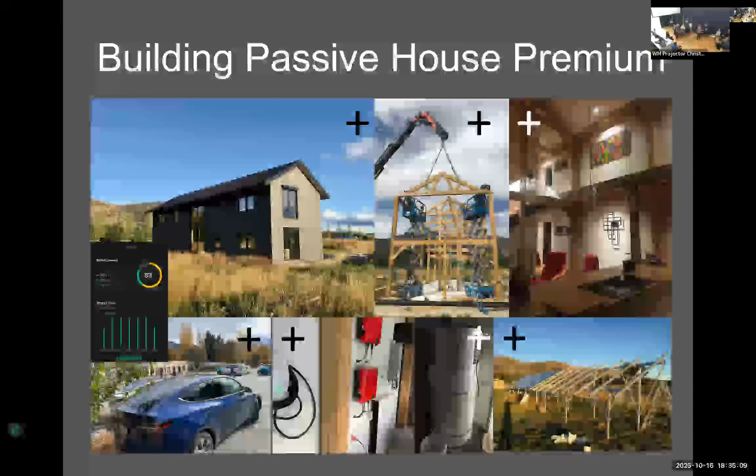On the left-hand side is the Centre for Net Zero, set up by Octopus Energy. It's an assessment tool to assess demand responsiveness of your building - what measures you have. Pip mentioned the thermal envelope to store heat, store energy in your hot water cylinder, chemistry, battery, etc. I ran my house through that tool, and it's 100 out of 100. So I'd recommend, if you're looking at energy efficiency and want to assess demand response, there's a tool.

The Shelly Relay, that blue box, is about $80. It permanently shifts the hot water cylinder away from expensive energy, so it can only run between the hours of 11 and 5 o'clock, and it doesn't touch the power - that's also the time when I'm generating. So I'm permanently shifting.

The nice new solar array, which cost $3,000 and generates power at 2.4 cents a kilowatt hour, could be exported onto the Aurora network at 60 cents a kilowatt hour at peak time. So that's how you can make money or save money. These are two graphs - the graph on the left is August, winter 2024, and with that extra oversizing of the solar array, I've basically got 38% more power generated, and that's $1,000 worth of panels. So solar is just so cheap now.

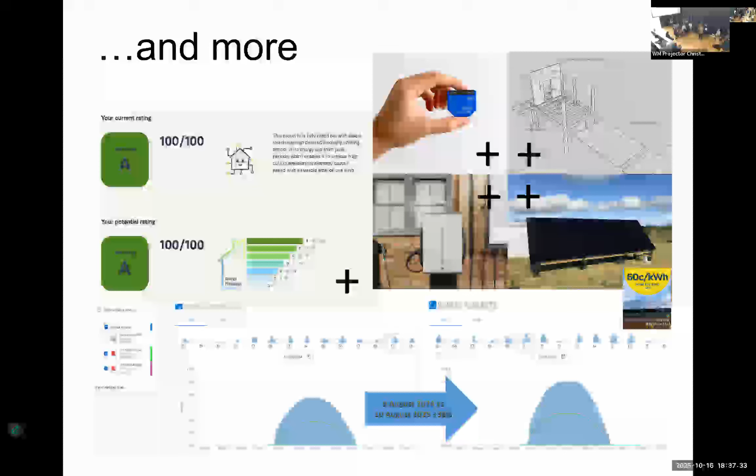The little diagram on the right is some building work we're going to do on the house. So what's the future? You can do fabric first, as mentioned, which is basically retrofit, but zero bills is the equivalent for new buildings.

It's an Octopus Energy product, and they give you a guarantee you get no power bill in the UK for 10 years. They're already doing that in New Zealand on the North Island - power generation from solar with a battery, guarantee you can take to the bank, no power bill, for 5 years.

I've worked with Tim Ross, an architect who lives in a passive house co-housing project in Dunedin. Octopus are running his project for the 26 houses through zero bills right now to size the solar array and batteries. E-House, who build passive houses around the country, are assessing zero bills homes. There's a medical center in Queenstown doing zero bills for a medical center, with solar panels on the lease building and giving the system to the landlord. Schools are currently working with a professor at University of Canterbury to make a school no-bills.

I'm not going to play the video because it sounds like an Octopus ad and I'm already wearing their socks. So I'll explain how it works.

They take the house, they drop it in the grid, they forecast ahead for the next 5 or 10 years what they can make from selling your power, what they have to pay to buy the power you'll need, cover all the fixed charges from the lines company and Transpower, and give you double the allowance for what you use today. And then they issue a guarantee - no bill.

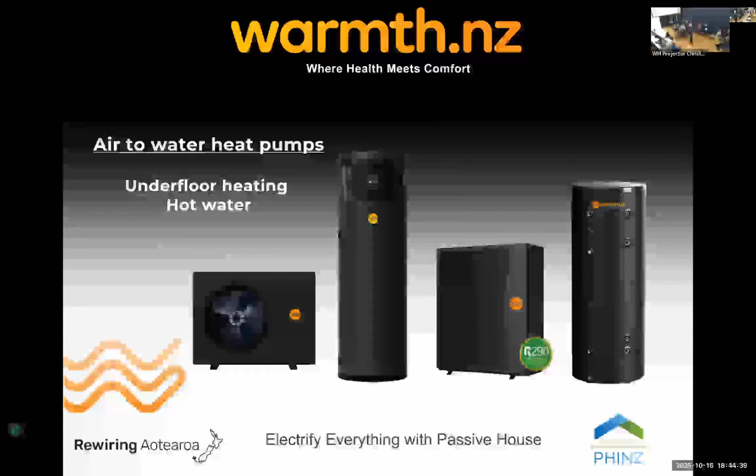That's what Warmth is really passionate about, and Warmth can help in that regard. We're here to help, and we do that via hot water heat pumps, specialised air to water heat pumps, underfloor heating systems, and heat recovery ventilation. A couple of our ventilation systems are Passive House certified as well.

That's really about it for me. I'm not going to bore you with specs and stats and things. The bottom line is that we're here to help - enjoy the food.

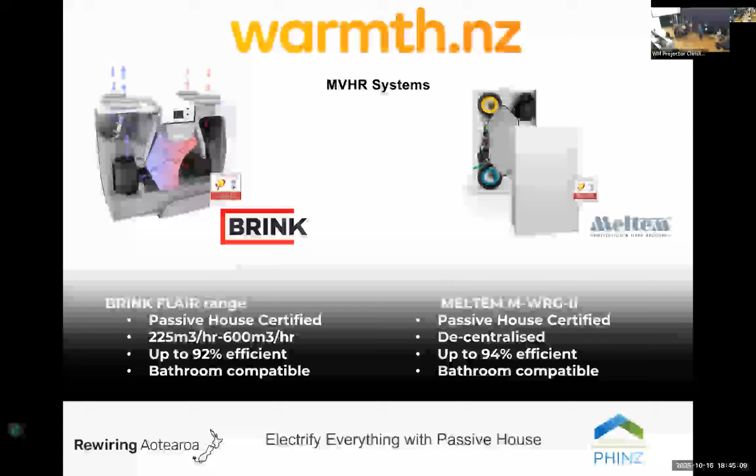I'm going to get quite narrow into the thinking here and give you some tools on how to think about your solar system, and some decisions you might want to consider when choosing a provider, products, and the service you might be after.

Within the Think Solar Group, we currently have 6 branches. We're not just here in Christchurch - you can see them up there: Wanaka, Dunedin, Queenstown, Nelson, Timaru. This all started off in Wanaka in 2013 with Dean Dunning, and we've grown to these branches all around the South Island.

Now, some key values we believe in, which we've tried to streamline for customers. Before I go into this, raise your hand if you've either considered solar PV or have solar PV on the house you're in right now. Right, yeah. And then leave your hands raised if that was a great experience for you.